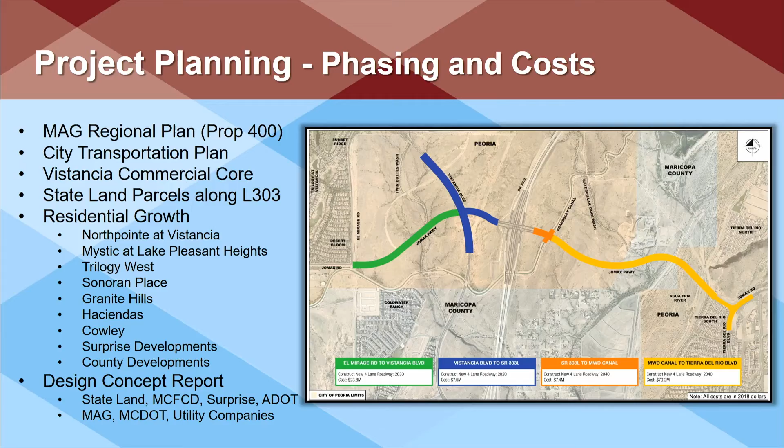The yellow or goldenrod segment is the connection from Beardsley to Tierra del Rio, crossing a major wash and the Agua Fria River. The price tag on that is a whopping $70 million. We project that would be needed after 2040, long after many of us will be sitting here. I wanted to show you we've taken this into consideration, and because it's regionally funded, we brought in all of the partners to look at this together.

So let's get back to what we're building tonight. As you can see, the Loop 303 interchange was always planned to be there, and ADOT is out there building the last remaining segments.

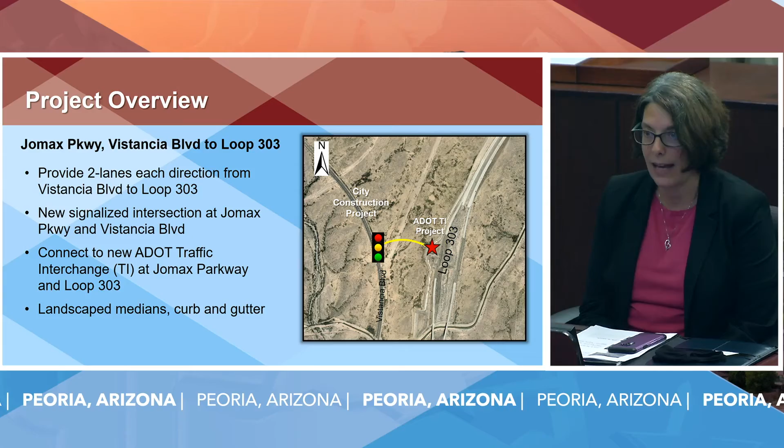Our section will provide 2 lanes in each direction, connecting to Vistancia Boulevard with a new signal. It will include median modifications for turn lanes needed on Vistancia. There will be a landscape median on Jomax filled with desert vegetation—cacti and desert trees—because there is no water in the area.

So we'll be doing a temporary irrigation system for 6 months to establish the plants. It's all very interesting; we've been working with parks on it.

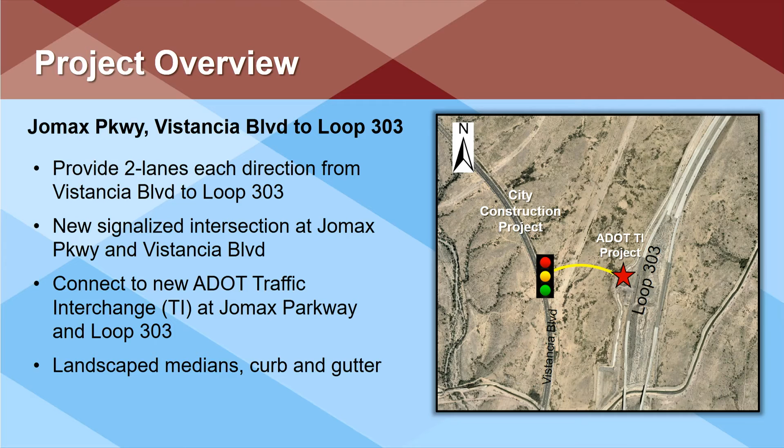We have included some pictures of the construction that's been going on at the 303. If you haven't been out there, it's always fascinating to watch construction, at least from my point of view.

For this project, we went through the procurement process, which materials management and finance handles for us. We had 6 contractors bid on the project, and the bids ranged from our low bid tonight, approximately $3.6 million, to $4.2 million.

The 3 lowest bids were all under $3.8 million, which is always good for us to see—that there wasn't a great discrepancy between those lower bids.

J. Banicki is the low bidder, and they have done past work in Peoria. They have been awarded job order contracts with us before for our bridge program and roadway projects. So they're very familiar with our process and procedures, and we've worked well together.

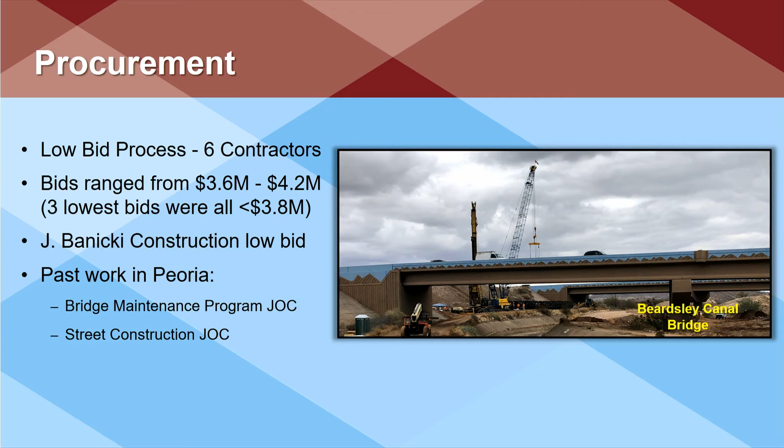One thing we always like to talk about is traffic—what's going to happen during construction? The pictures you see of ADOT's project show they were able to erect temporary concrete barrier and maintain traffic flow through the area on the 303. Shoulders are taken away in much of the area, but the travel lanes remain.

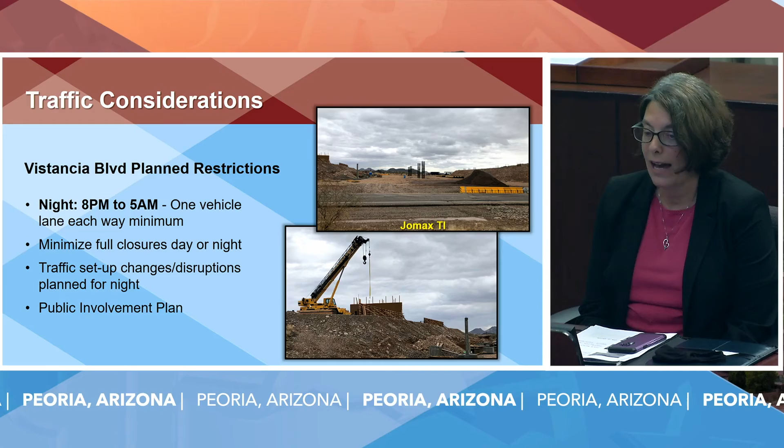For our project, we will only be out in the middle of traffic when we're connecting into Vistancia, doing that signal and median work. The plan right now is to have nighttime closures between 8 and 5 a.m., with one lane open in each direction. If we did have a closure, we would minimize it for the specific work that had to be done. As we sit down with the contractor, we'll detail when those timeframes are.

We also have a public involvement plan so we can notify the people in the area that use the road.

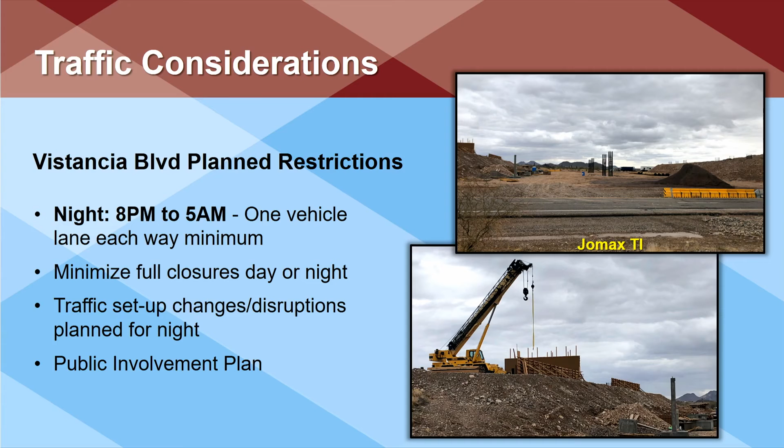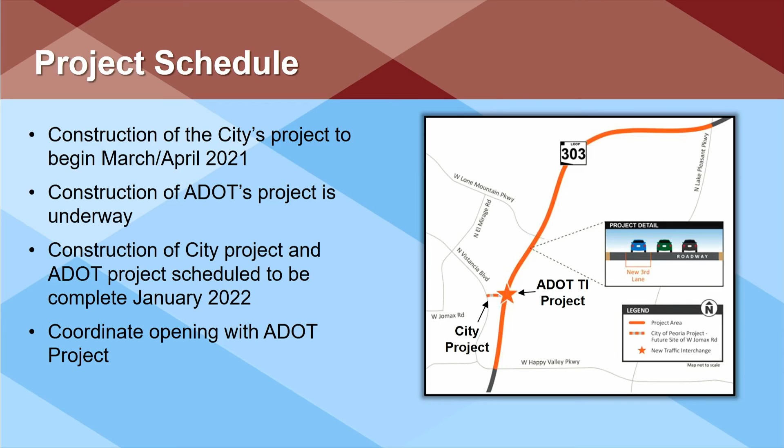On to the bigger project schedule. As you can see, ADOT's big orange project stretches all the way from Happy Valley to Lake Pleasant. They started in December. Our project, the little tiny section next to the star, will be starting in March or April of this year. The construction is coordinated between both companies, with project managers attending each other's construction meetings.

Both projects are scheduled to be open at the end of January 2022, a year from now. Ideally COVID will be much in control and we can have a lovely ribbon cutting and celebrate this new connection to the north from the 303.

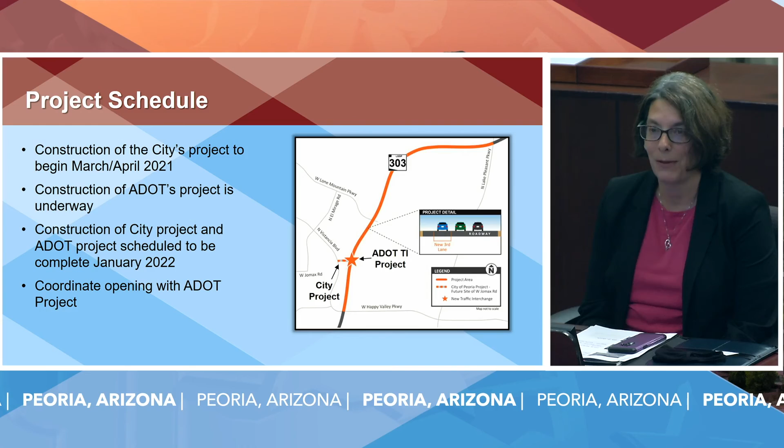Staff is recommending that we award the contract to J. Banachke Construction in the amount of $3.5 million and some change to construct Jomax Road from Vistancia to the Loop 303 interchange. Do you have any questions for me?

Thank you. Council, are there any questions for Ms. Lund? No questions, because it was such a great presentation.

So do we have a motion on item 12R? I motion to approve item 12R. Second. We have a motion and a second. Council, please vote. And it passes unanimously.